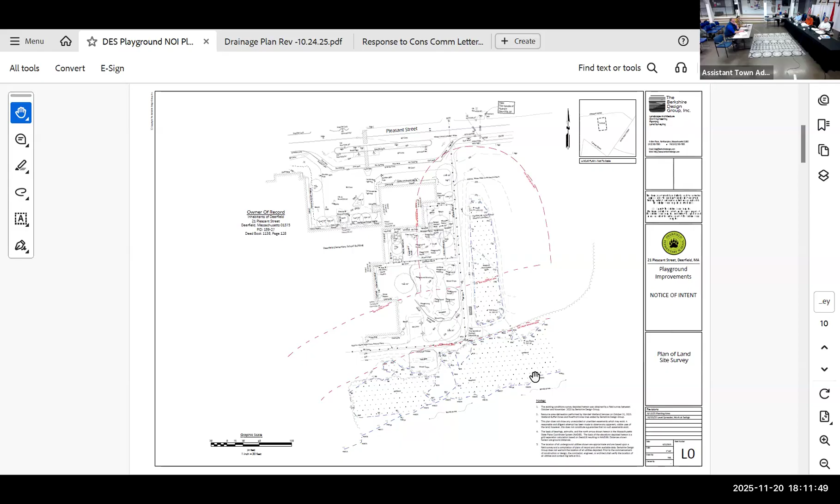On the slope? Higher, yep. And that would be a new pipe that goes out to a spreader? Yes, this is a new pipe that goes out to a spreader. This is the existing conditions plan. I can zoom in a little bit. Okay, no, I was just trying to get the horizontal picture coming across.

The second one, you mentioned the request for a 2-to-1 on the reclamation area. I think it was not a request per se. Initially you had a 1-to-1, but within the riverfront area, redevelopment within the stipulation called for a 2-to-1. So it wasn't a request, it was part of the regulation that we pointed out to you. I just want that clarification.

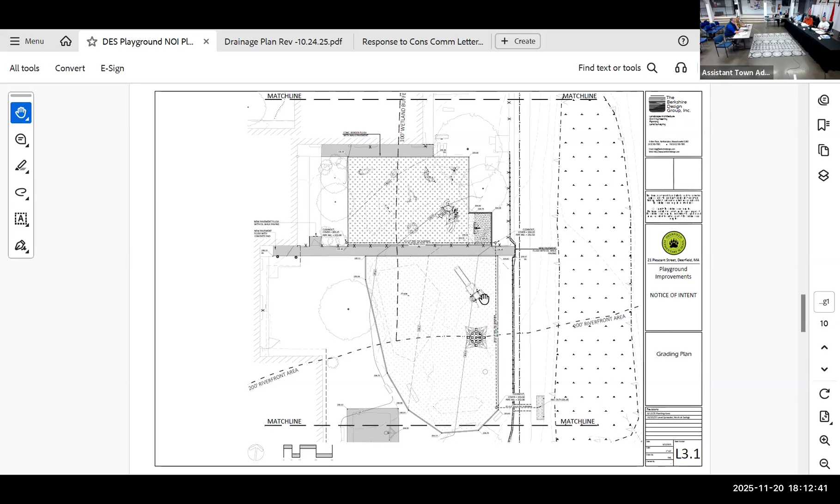And so that is the extent of the project. What we were proposing originally was, again, the recycled rubber. That recycled rubber would have had a profile with the under drain right at the bottom, which is what you're seeing here. So the surface is the rubber, then we have a leveling course of gravel, then we have gravel, and then we would have had this pipe pretty much right at the bottom here.

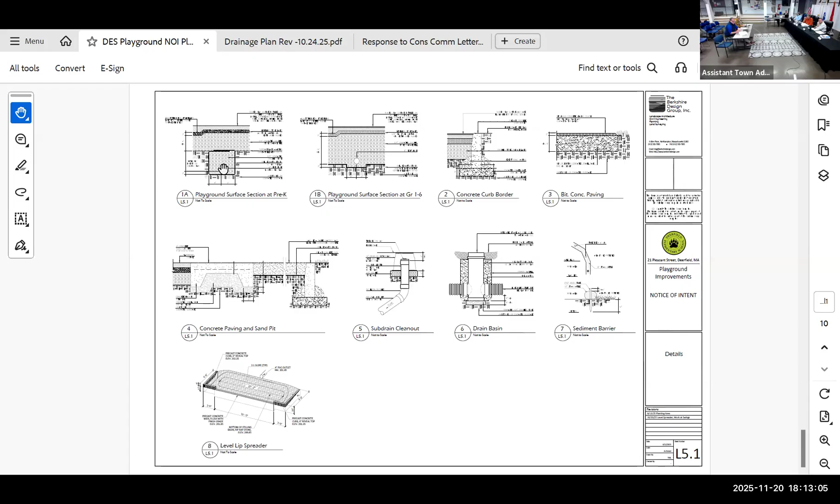What we are proposing now, in conjunction with doing the full EPDM non-recycled rubber, would be to elevate that pipe. And I'm going to show you right here.

So what we are proposing is to elevate that pipe, not being at the bottom of the actual gravel, but be elevated by around 3 inches, or exactly 3 inches, above the gravel. And what that would do would be allow for some infiltration.

The board had requested or had asked if we had done some test pits. We had said that we didn't do our normal test pits we would do for a parking lot, because those normally take a larger machine to do, and we didn't want to disrupt the playground. But as the board asked, then we went out.

Actually, that was on the Sunday after the meeting, so that was the 30th of October, which we had a big storm that night. I went out on Sunday with a post digger, which is not an official test pit. We normally want to go 7 feet deep, and we want to make it a certain size, but trying to prevent disturbing the playground so that it keeps working for now, I went out and did a test pit about 4 feet deep, which we included in the package.

And we took some samples, took pictures of the whole process. We brought that back to our office. Our engineer looked at it, and he did a certification of the test pit, saying what type of material it was, which is a loamy sand. So being a loamy sand, that's a material that actually is good for infiltration.

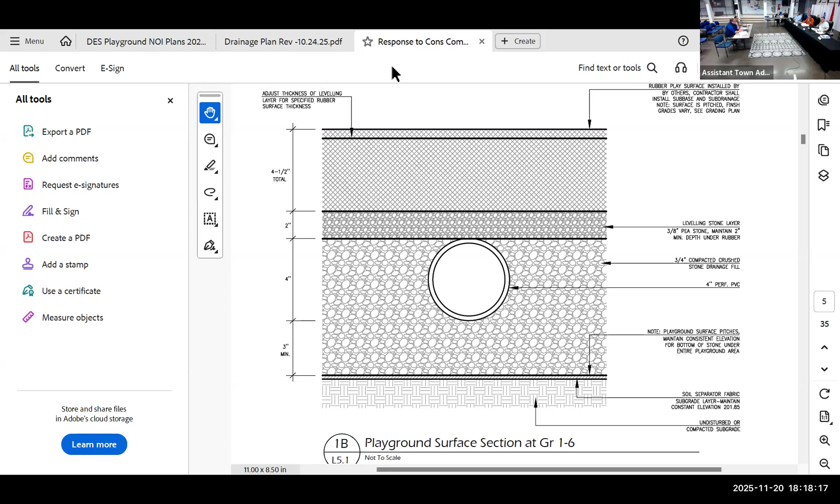But that's what we are, in addition to handling the storm, which I think is going to be a great thing, because then we prevent as much water coming out of our surface into the resource. In addition to that, having that amount of capacity for infiltration also shows that there is an uptake of some of the contaminants or the heavy metals, and zinc in particular, which I know was a concern after the several documents you guys sent us and the conversation we had last time when we were here.

I just had to interrupt quickly. It came in really late this afternoon. Did the commissioners have any chance to look at that? I thought I printed it out for everybody, but I don't seem to have it here. I have a copy if you need it. Up until now. Yeah. So I'm not sure we have the ability to apply it, but okay. So Sean, I'm not sure if you were able to see it. I can, and I have a paper copy if you want it. I can definitely share with you, or I can share it on the screen.

And basically what we did, I wanted to make sure that what I had said in the letter had some background, because we had done the numbers, but we didn't have those numbers. Was this based on the latest edition? I think it's revision 2 or volume 2 of the stormwater handbook from the state. Yes. So the BMPs, you did a search on that? Yeah. All by the book, as they would say. Okay. So various BMPs would be applicable to metals uptake.

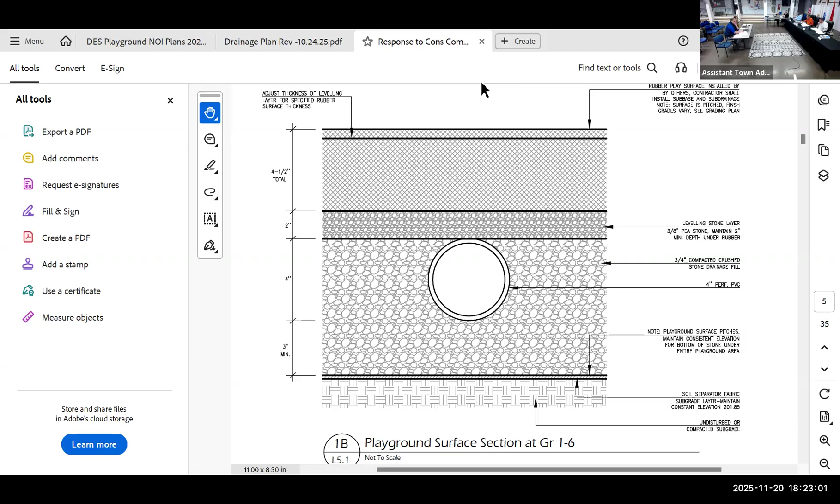They do show removals of some metals, and I don't see the exact percentage here, but the design would have to be as such. Okay, I just wanted to make sure you looked at all the BMPs, and I think you answered that. Yep. Okay. So that would be the first option. We put 2 options into that last document that we sent.

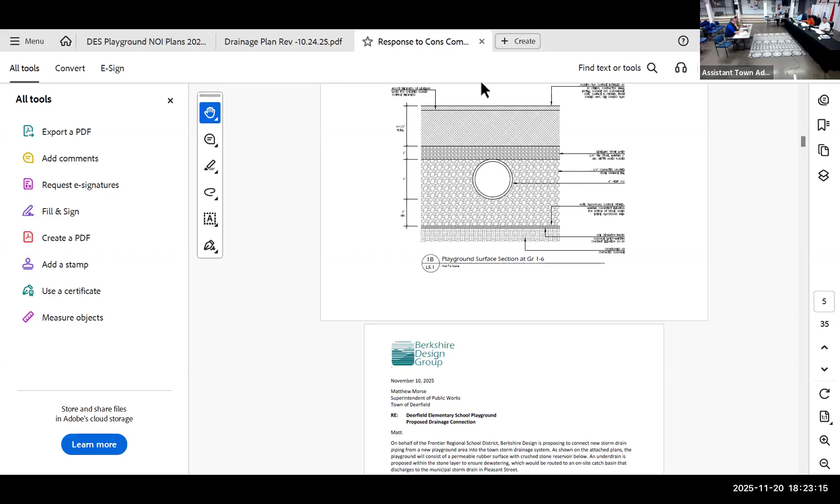The second option would be to try to get basically any of the storms that would hit this site, all the way to the 100-year storm, and capture it completely by the gravel layer underneath the safety surface. In addition to that, we'd add a larger pipe to collect all that water within the 10 all the way to the 100-year storm, get it out of the riparian zone or any of the buffer zone of the wetlands, and direct it to a catch basin at the street.

Again, I think the first option is the ideal one. This is basically an option just to take the drainage that's coming out of here and take it out of the riparian zone, but it's more of a technicality. We're taking it away from the regulatory areas and putting it in a catch basin. We talked to DPW, as you had asked us, and we gave him as much information as he requested. Last Monday he answered that there didn't seem to be an issue doing that in regards to the system.

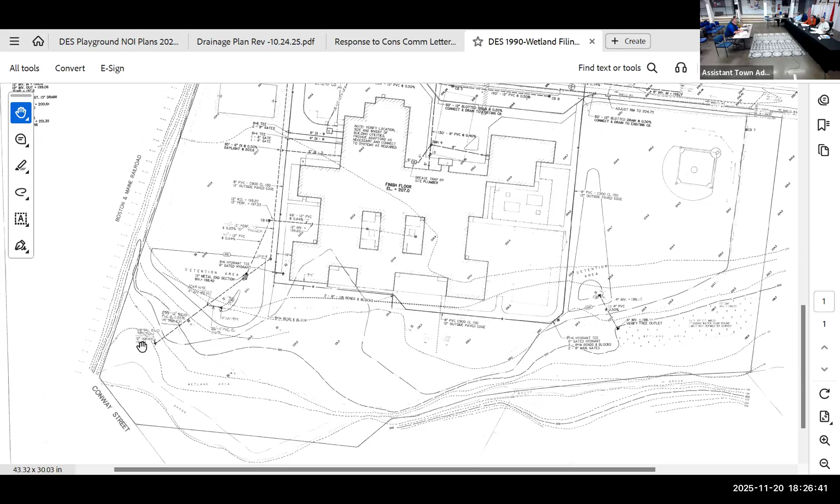But it seems like everything eventually makes it to this control structure, which normally has baffles inside, and if it gets to a certain level, it directs the water in a certain direction. Then there's an overflow pipe that goes along the west side of the school, eventually goes under another retention pond, and outlets straight out to the Bloody Brook on the opposite side. I know there were questions last time as to where the water goes. I just want everybody to be clear that it basically goes all the way around and eventually makes it back to the Bloody Brook.

That's very helpful, thank you, because I talked to Matt Morse at DPW today to see where he's at, and he's comfortable with the amount of material, but he had a question of where it goes. He didn't know if it was the detention basin on the railroad side, this one, or if it was coming back, so that answered that question. He had another question on the 17th: would you have any updated plans for a deeper drainage system? He wrote back he'd try to get that before the 20th. Were you able to?

It's basically the package we've shared with you that shows the pipe elevated 3 inches, so now we have the 3 inches for infiltration. Okay, when I talked to Matthew earlier today he wasn't sure, so just clarifying that so other members of the commission know.

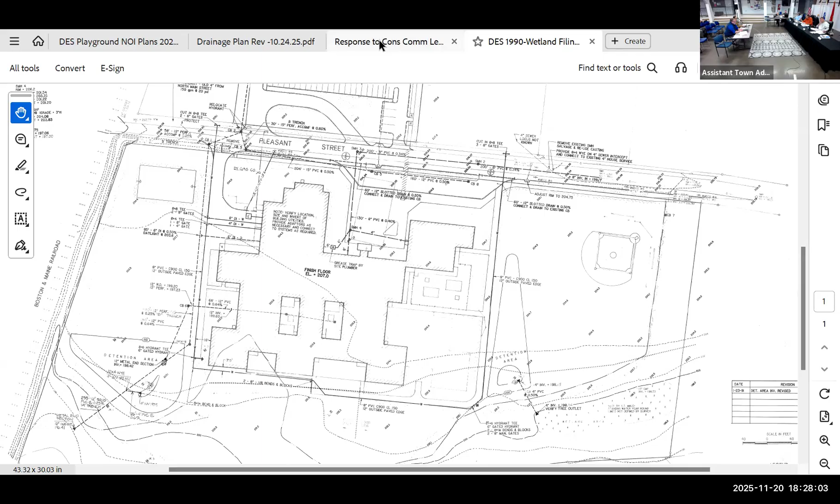So did you look at, if we're taking the water out of the playground underneath the structure, which is in the resource area, pumping it back out to Pleasant Street, turning it back around, taking it down to the detention pond on the west-hand side, and then into the Bloody Brook discharge, is that a continuous hydrologic connection? It actually goes first, more than likely on the first events, back to the parking lot because there's a retention pond there.

When a larger storm comes in, then that overflows and then goes back. But yes, it's connected to the same system. So it's not a separation of the resource area. It's just a kind of extension in a roundabout way of what you're taking from the resource area, moving up outside of the resource area and bringing back to the same spot.

Yeah, so that's the logic of the connections there, because all the water basically on Pleasant Street leads to all the other catch basins, goes all the east side, and eventually makes it to the overpass or a little bridge that's there and outlets there. So there's no other place where this water would go.

So it's important, I think, when you look at that option, it sounds like we're pumping it away. It's a gravity feed system, not a pump, sorry. But it's going to come back around to the starting area, which is going to be the same as option one; it's going to go to the Bloody Brook as well. Just clarification. Yep, that's why I wanted to be completely transparent on that.

The only thing we're doing here is taking it out of the point discharge itself. It's taken completely out of the riparian zone or the buffer zone, so it's outside of jurisdiction, but it does go into the same system. But it may be within jurisdiction if it's a continuous hydrologic connection, because you're working within the resource area, moving some of that resource out and bringing it back to it. Completely understand. But we're putting the actual outlet outside of the resource. That's what we tried. A little nuance to this one, but just want everybody to understand, it's coming back to the same place.

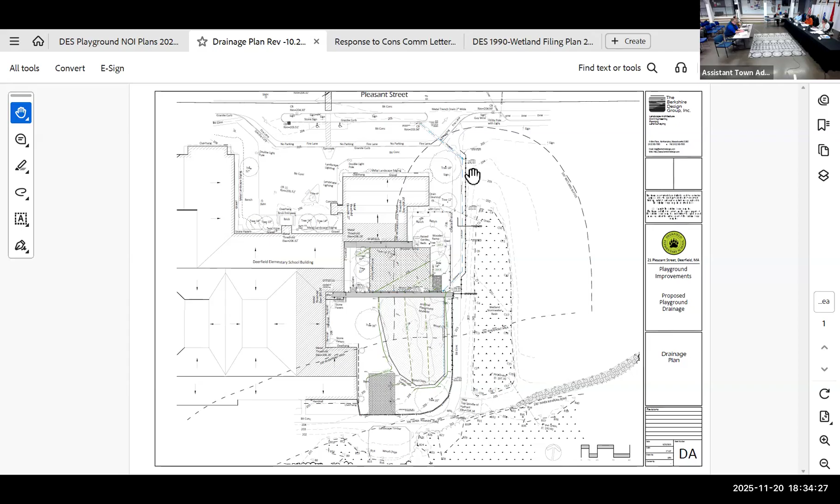I know it's really hard for us as volunteers to work through some of this stuff. I would love it if we would have found somebody who took a playground and did a long-term study, take the under drain and start taking samples of the under drain of an actual playground with the surface and just do a long-term study. That, to me, seemed the most logical way, but everybody's doing these studies where they take a little piece of something

and they dissolve it. We need to find a grad student, a PhD student, to get a research project. I would love it, I would put a paper. I would love to be that grad student right now, but unfortunately I'm not anymore.

But it does leave us trying to decide on the material in the ground. We don't have leachable studies, we have some indication, we asked for some type of encapsulation, there's no enhancements to the detention areas. We did ask for the groundwater and soil studies, which is basically a fundamental request for any work like this. That was declined, because they didn't want to bring the heavy equipment out there. So we didn't do a full study. Thank you for doing the one soil boring test pit to 4 feet. I'm amazed there was no groundwater at 4 feet.

Interestingly enough, when you look at the retention pond, the outlet is at 197, I believe, and this is like a 204 or something like that. Even after that storm, there was a little bit of standing water right at the bottom of the corner here. But that is still lower than the 4 feet under the playground, because it drops. 207. When I was out there, it made sense.

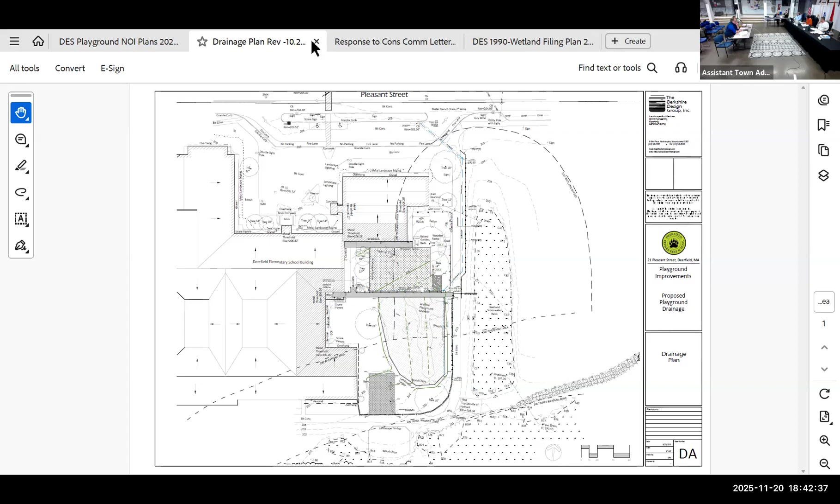I ask the commission, do you think you've got enough information to close out the hearing? Because when we close out the hearing, there'll be no additional materials taken in that could be presented. So do you think you're in a place where you have information that you can make decisions on? And it's really hard to explain the decision because the NOI that was submitted, there's so many potential alterations to it and options. There's 2 new options tonight, and they're not articulated in a revised NOI.

We could ask that the consultant provide an NOI with something that we'd agree to, but otherwise we're going to have to write it up pretty much ourselves. But those are the decisions. The NOI that's been brought in front of us, taking into effect the comments and discussions over the last 4 or 5 months, and emails and so forth that we would have to try to put together. If I may, I don't know if I can. Yeah, I haven't closed it yet, so go ahead.

I think it's spelled out in the last letter that we sent you, the option. It's basically the same on the horizontal, it's the same design. We just have changed what type of surface it is instead of the recycled rubber. So on the last letter that we sent you, which was Monday, there are 2 options. The first option would be the one that I think is ideal, which is using fully non-recycled rubber all the way through, even though it's more expensive than if we use the recycled rubber. And then elevating that pipe, the drainage pipe, so that we can have an area underneath that would help for infiltration.

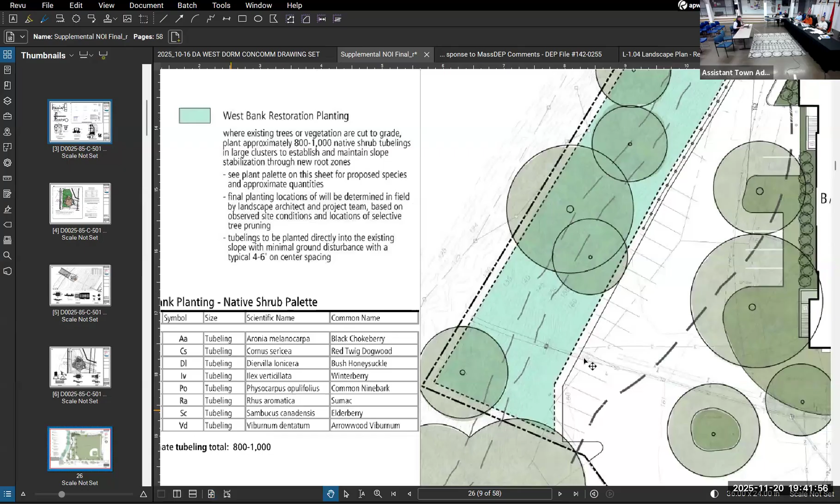So I was going to ask you about that. So it's just a variety of tubelings to see which works? Yep. Yeah. So we have, as I mentioned verbally last time, and I'll have to send you a new sheet. This table was on a no plot layer on the landscape architect's drawings. But it was verbally mentioned at the last meeting: the black chokeberry, the red twig dogwood, bush honeysuckle, winterberry, common ninebark, sumac, elderberry, and arrowwood viburnum.

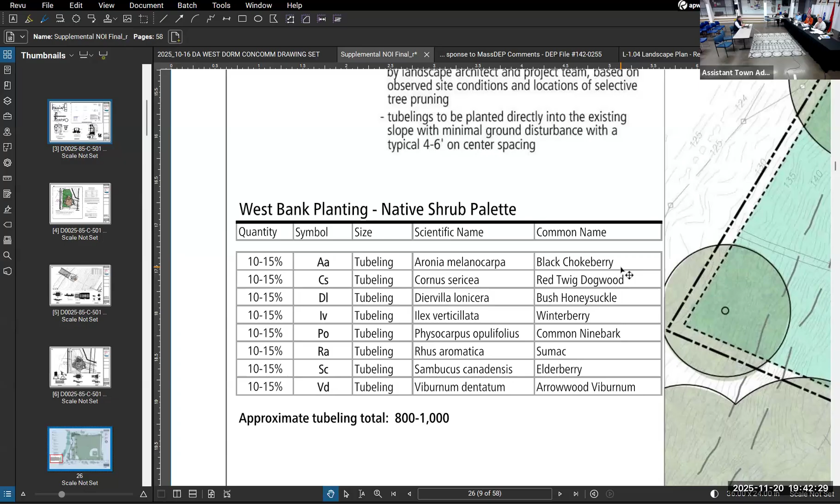We're proposing to put these in about 10 to 15%. So yes, the idea is to have these and see what's thriving and what's surviving, and have these be in a mixed array under the guidance of the landscape architect, as noted on the plan. That's the West Bank restoration plan that was on the back here? That would be correct. Yeah. Okay. So it's going to go on that bank. Yes, this entire light green shaded area here. 4 to 6 feet on center across that entire bank area. Okay. Thank you.

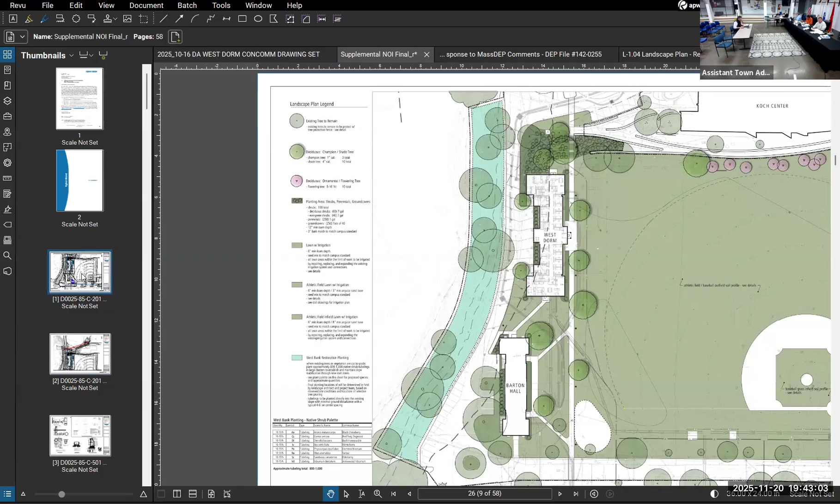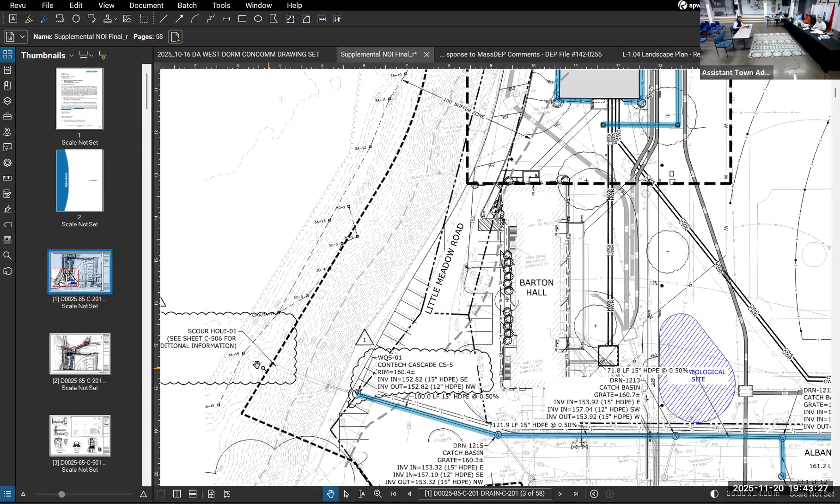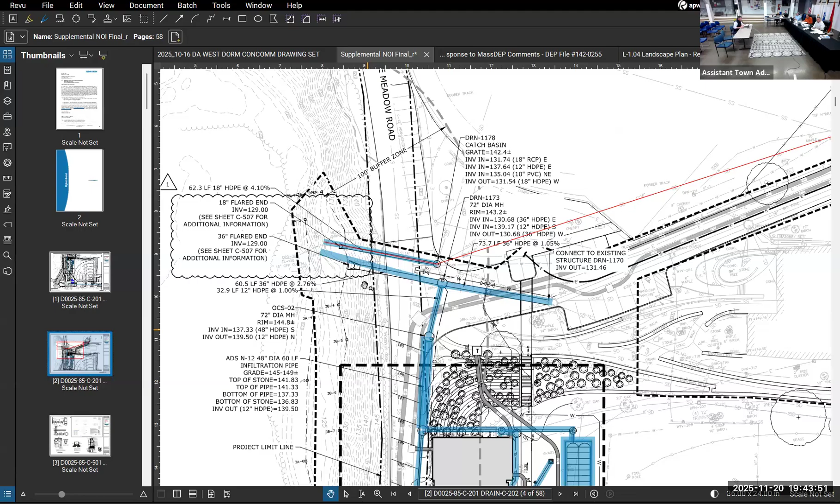Going back up to the plans that were resubmitted, we had the stormwater basins, and here we had the updated hydrodynamic separator off of Albany Road. Again, the storm lines are highlighted in blue. So this one to the south is the hydrodynamic separator that's being proposed right in the parking areas, before then continuing down to the chute, which is detailed on a separate page. Up to the north as well, we had the new 36-inch culvert that was being installed. And again, we are pulling back those outfalls further to Little Meadow Road. And then I'll show you on a separate page where we have details of those outfalls.

So this is the outfall for the wetland restoration at the Little Meadow Road outfall. This is the northern one. What we're proposing for mitigation of wetland disturbance is not only are we pulling these outfalls back to the east, we're going to go in and remove all of the riprap that's there. If you've been out to the site, the existing pipe is cascading out into the wetland itself, and there is a large amount of riprap that is encircling that whole area. So we'd be removing that, restoring it with wetland plants, and pulling back the outfalls, putting in the scour hole for the 36 and a riprap apron for the 18-inch pipe.

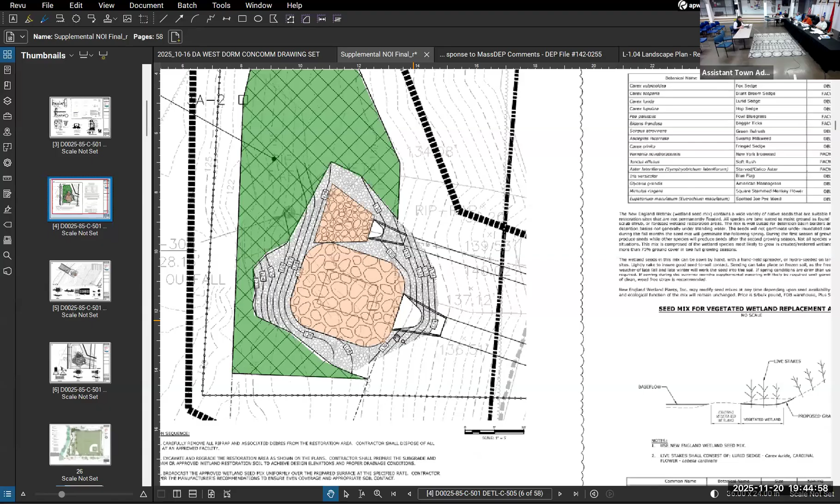And both those outlets would be at surface level, or buried a little bit, tucked into the hillside. Good. So they would not be, and get rid of that waterfall. Get rid of the waterfall feature. Yep. And then for the southern outfall, that's down the corrugated metal half pipe that comes down the hill. This is installing the scour hole at the bottom of that half pipe, so that there's a plunge pool for water to gather, and then an apron to disperse down to the wetland itself.

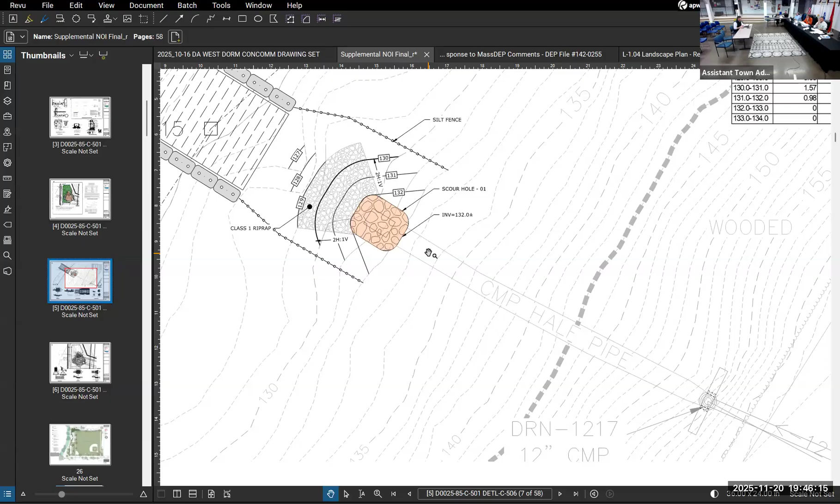I had just a question on that one. It's amazing seeing that coming down the hill, that little half tube. Is that enough sizing, you think, for the riprap to maintain the water flow that comes down? I don't know what the water flow is at its peak and volume, but it just seemed like kind of a small area there at the bottom. It comes down at a pretty good velocity, I would assume. It does. We did size this. It's 8 feet per second in the 10-year storm. The existing is around 7 feet per second. So while it's a larger amount of structures tying to it, it's not dramatically increasing the velocity.

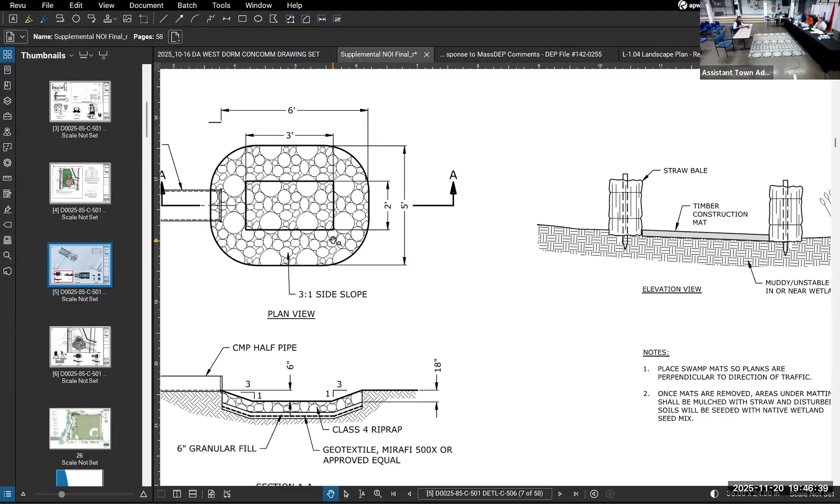And we did size that accordingly. The riprap is larger riprap, around that 12 to 18-inch stone. It's embedded 18 inches deep. So even though footprint-wise it's 5 foot by 6 foot, the stone size itself is larger for that. Yeah, okay. The whole area looks like an 18 by 15. Is that the right one? Or no, that's it. It's a 6 by 5. Yeah. With a 2 by 3.

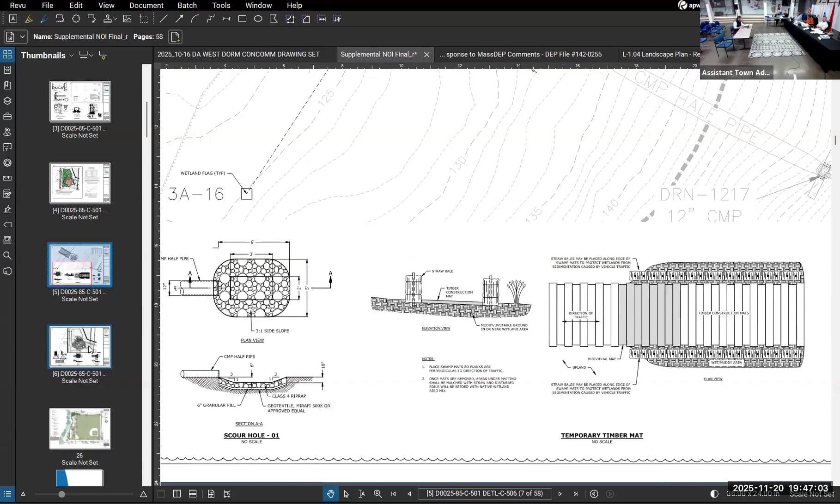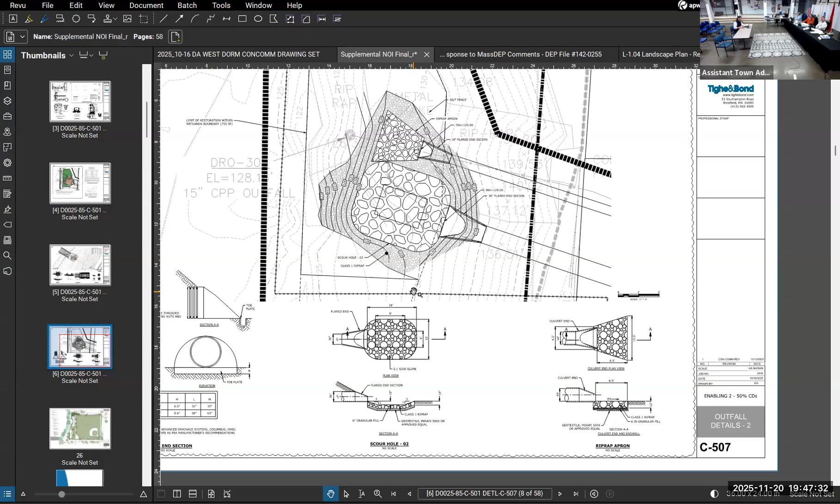Yeah, this is the northern one. That is a larger 15x18. The flow coming out of that 36-inch pipe is much larger. So while the corrugated metal half pipe from the previous one certainly looks much larger, and certainly has the steepness of the hillside, the contributing watershed to that outfall is not nearly as large as what's coming through the 36-inch culvert. So those sizings do reflect those hydraulic calculations.

So that is the update to the plans that are in the NOI. The entire NOI text was revised and sent in as well. Would you like to discuss the?

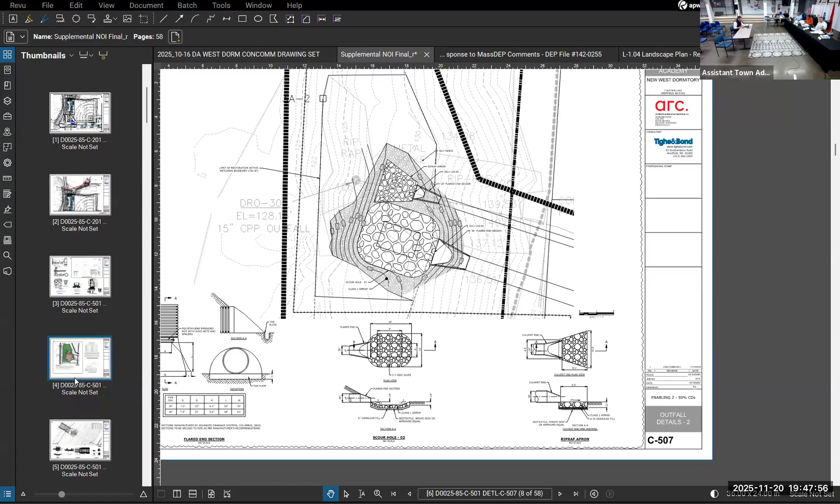Correct. We had talked about potential erosion controls at the bottom of the hill as well. A good point. We were looking at that. So during that work where you're taking down the trees and such, there's going to be some interruption of banking and soils and so forth. So we're considering a condition of running a line of erosion control at the base of the hill before it hits the swale. Yeah, we would be agreeable to that. Okay, thanks for reminding me on that. Erosion control at base.

During the tree removal section, and just leave it there for base of slope, and also stumps. Okay.

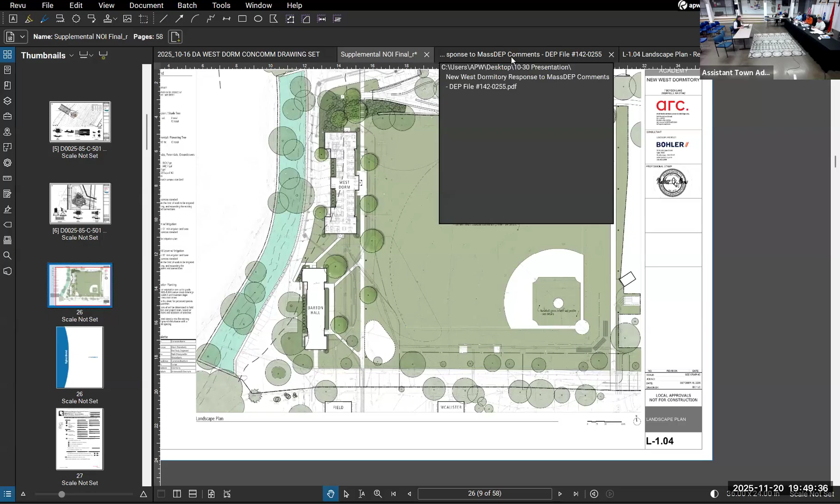You had the letter back. DEP had 7 or 8 comments, I think. If everybody has read that, I don't see anything jump out at me. I think a lot of those questions were answered in this. On the first one, the impact, the proposed alterations. Was that an increase or decrease? So it wound up being an increase when we went to do the new culvert headwalls and the scour pads. So we had to increase our disturbance to better the situation. Agreed.

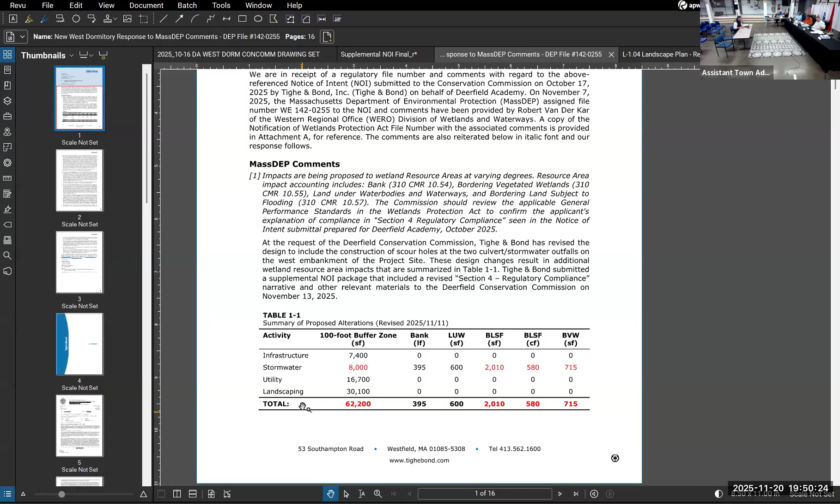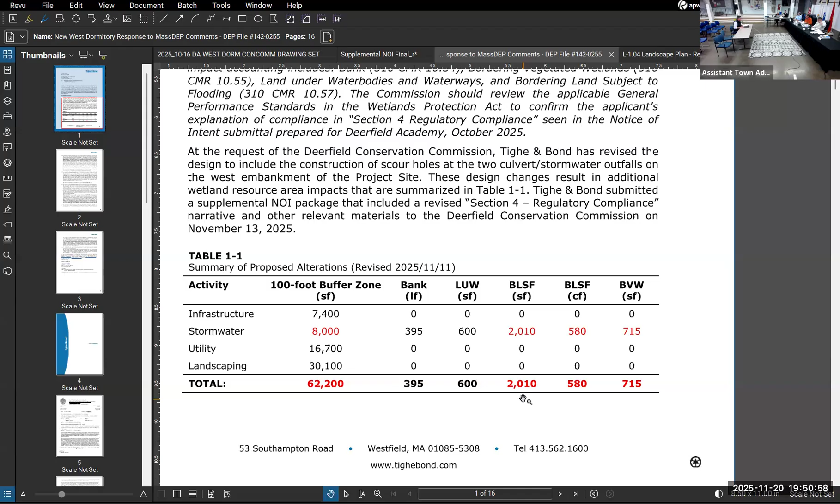And which one of these is an increase? That's the stormwater one in red. Question 1, there's a table on the bottom. Which one was it, stormwater, the second line? Yes, second line stormwater. So it's 4,200 square feet or so. Okay. So some increase of work in the area. But I would suggest that's an improvement from what the scour zones are now, getting those scour pads in place.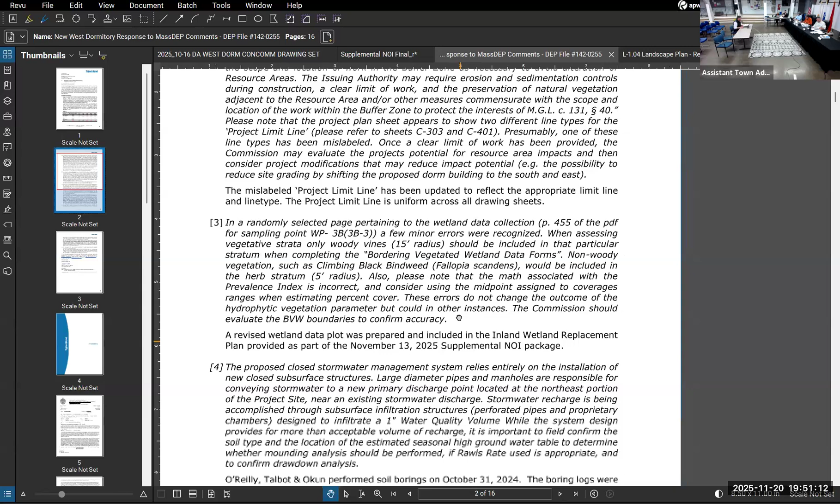Number 2, I had the question of the erosion controls at the bottom of the bank. We just talked about that. You fixed the project limit lines on your sheets. Yes. I can only find one on the new sheets.

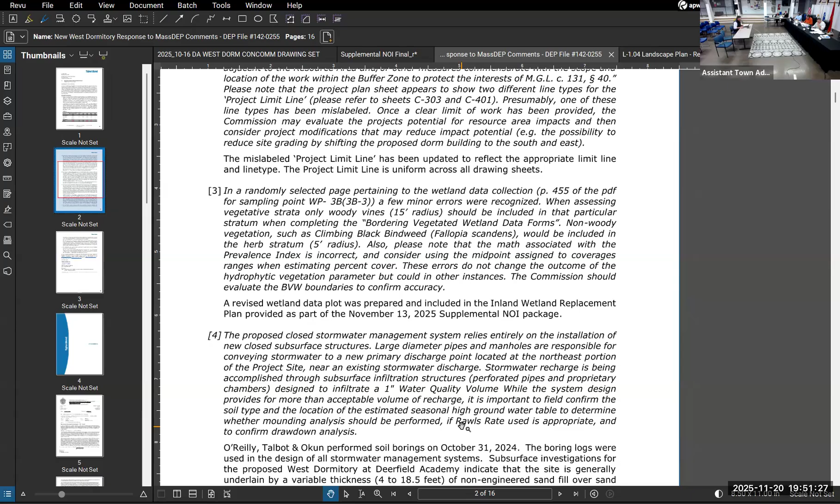Revised wetland data plot, this is question 3. I included the inland wetland replacement plan. And what was specifically on that? You said that was part of the November 13th submittal. Yes, we had updated that in there, but I believe when assessing the vegetated strata the numbers weren't quite right, so we revised those tables.

Chad, if you have any? Yeah, hi guys. Chad Raymer, wetland scientist. When we went out and delineated, a couple of those herbaceous viney species were included in the vine section, whereas they were supposed to be included in the herbaceous section. So we just flipped those species into the herbaceous section, and it changed a couple of the dominant plant species around. It's still hydrophytic vegetation within that wetland, so there's no real change there. We just moved some things around inside that plot.

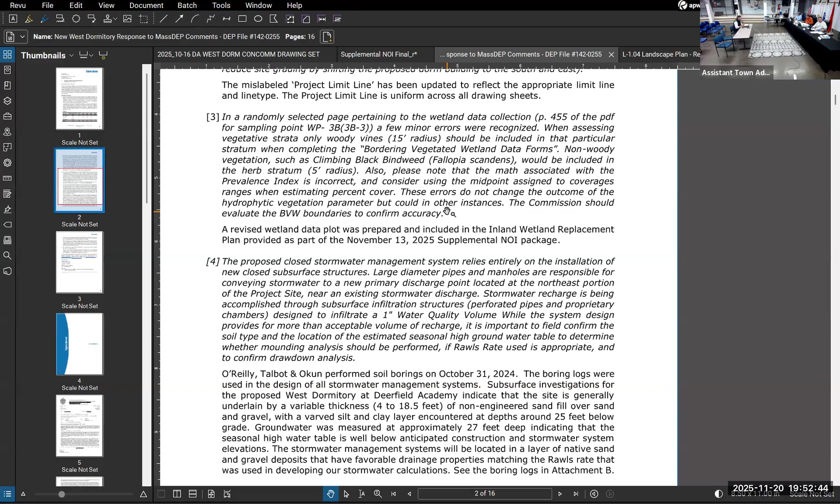Okay. All right, so I saw that, okay. Number 4, the stormwater management system and installation of subsurface structures, that seemed to be pretty straightforward. You did the soil studies. I looked at the soil and you got a lot of fill and then a lot of sand and gravel. Yep. And those are typical readings that we have all over campus. Yeah, I bet. It's just built up on, okay.

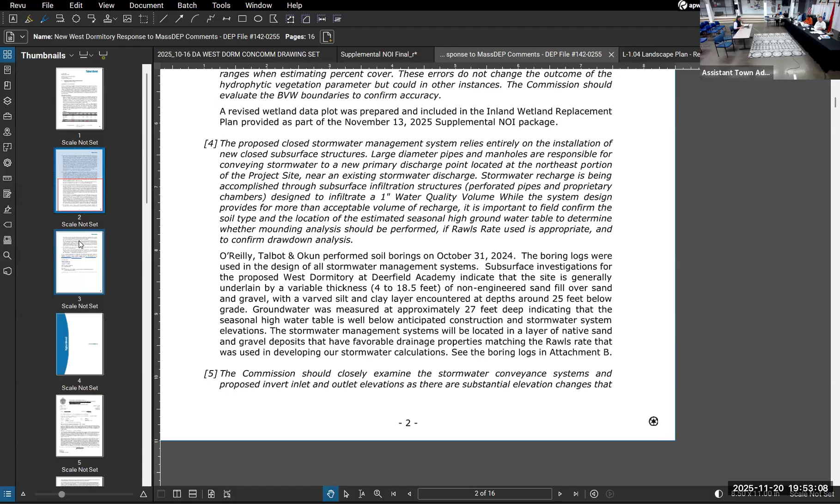Yeah, I don't see any other questions myself. They were answered. There were 6 questions from DEP. I just had a couple of questions I already asked, but did anything else jump out to anybody on the responses? No. Anything that you want to point out, Andrew, at all on this? No, I think this was just a continuation of the conversation we had last month. More than happy to throw in the extra erosion controls at the toe of the slope. And any other questions you have, I'd be happy to answer.

Yeah. Appreciate you getting that done by the time we had this following the last meeting, and having the revised NOI is helpful. Okay. Anything for you, Sean? Did you shake your head because we couldn't see you? Yeah, no, nothing to add. All right. So then I don't think we need any further information. Any other discussions from the commissioners?

I'll go ahead and close this hearing and take a motion to close the hearing. I'll make a motion to close the hearing. I have a second? I'll second. Okay, motion on the table to close out the hearing for the NOI for 0 Little Meadow Road. Take a quick roll call vote to close the hearing. John Libby, aye. Darren Damaris, aye.

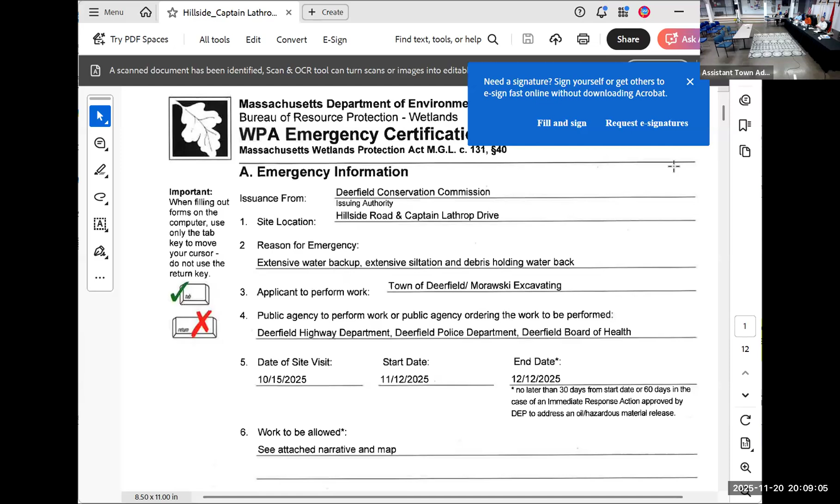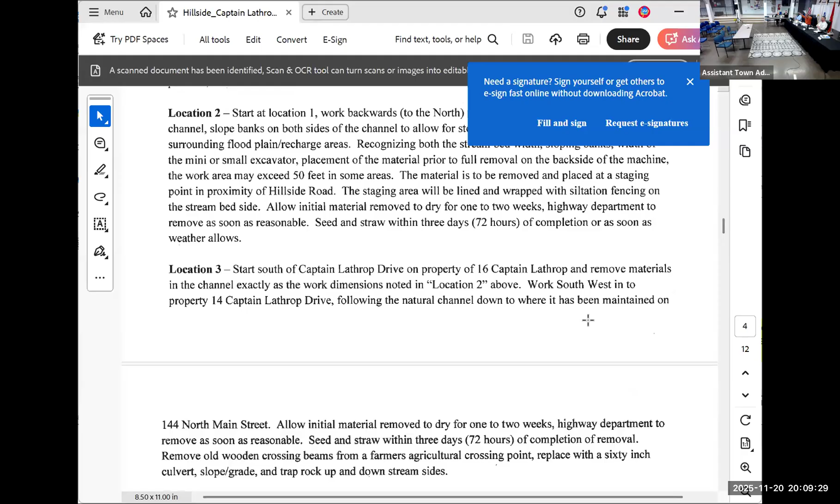Very, very minimal in depth what we're allowing them to do. But it did open it up quite a bit. There was actually some really good flow going in there. And by the time I left at 12:30, everybody was working to help the contractor get his excavator unstuck from the wetlands. It just sunk right in, right up to the top of the cabin. We got him out of there without a whole lot of fuss, but it's quite a quagmire back in there.

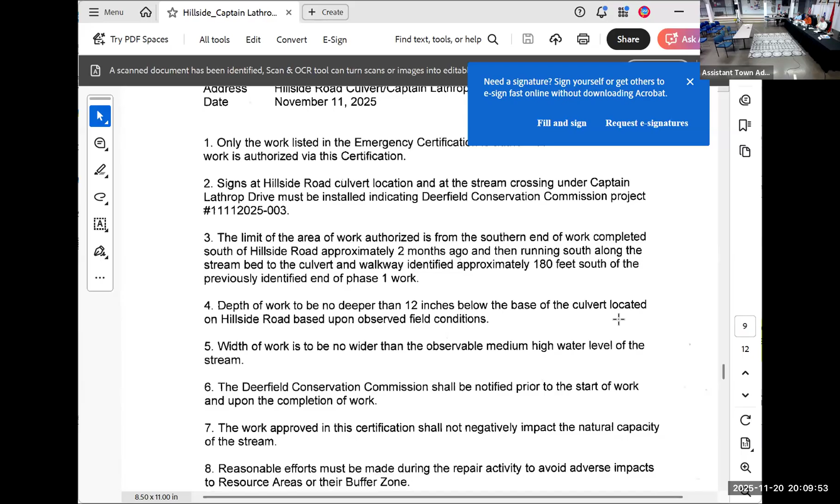So that part of it was done. Tomorrow we're meeting at 8 o'clock. If anybody else wants to join us, Tim and I with DPW, the contractor and chief, to look at that stretch between the middle of down below Hillside over to Captain Lathrop for what we need to do next.

And then early next week, we'll bring in a little small mini excavator, small guy, to do one or two more locations just south of Captain Lathrop, where we can reach down into the stream from certain residences right there off their lawns. And it's like minimum. I mean, we're maybe taking a couple of yards of material out in each place.

And now that material is getting taken to the transfer station. When it gets a little drier, we're trying to get it out of there within 2 weeks. That's part of the conditions. But Amy pulled that up. You can see all the conditions in there if you want to read through them.

Yeah, I was going to read. I think this is pretty much the same because we did vote on this, and then now this is a revised version of what you voted on. And I think the difference starts at condition 5, or even that. At condition 7 is what we've added since the last time.

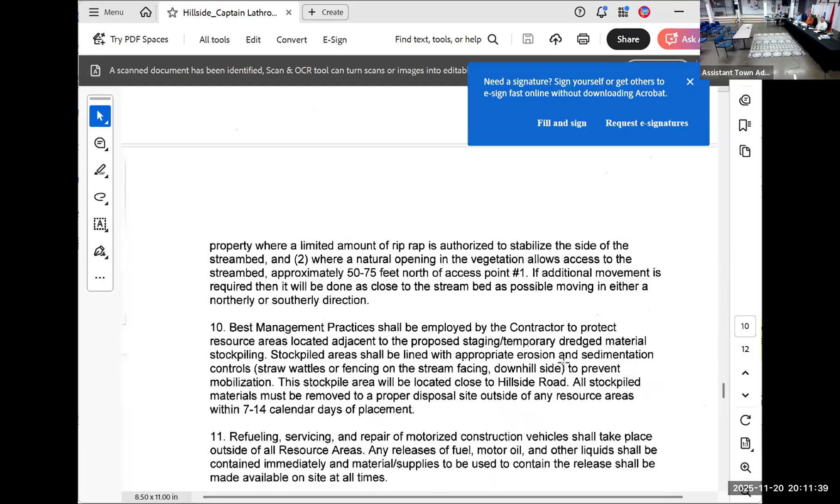The work approved in this certification shall not negatively impact the natural capacity of the stream. Reasonable efforts must be made during the repair activity to avoid adverse impacts to resource areas or their buffer zone. All staging areas and access points shall be minimized and limited to that necessary to allow the work with access to the site. Only 2 lateral access points will be allowed, one at the lower culvert, slightly southeast of the existing barn and the neighboring property where a limited amount of riprap is authorized to stabilize the side.

You guys can maybe read this. I didn't realize there were so many. Are you guys comfortable reading for yourselves? Or shall I read it into the record? I can't see it. Okay. So, I can keep reading.

Property where a limited amount of riprap is authorized to stabilize the side of the stream bed, and 2, where a natural opening in the vegetation allows access to the stream bed approximately 50 to 75 feet north of access point 1. If additional movement is required, then it will be done as close to the stream bed as possible, moving in either a northerly or southerly direction.

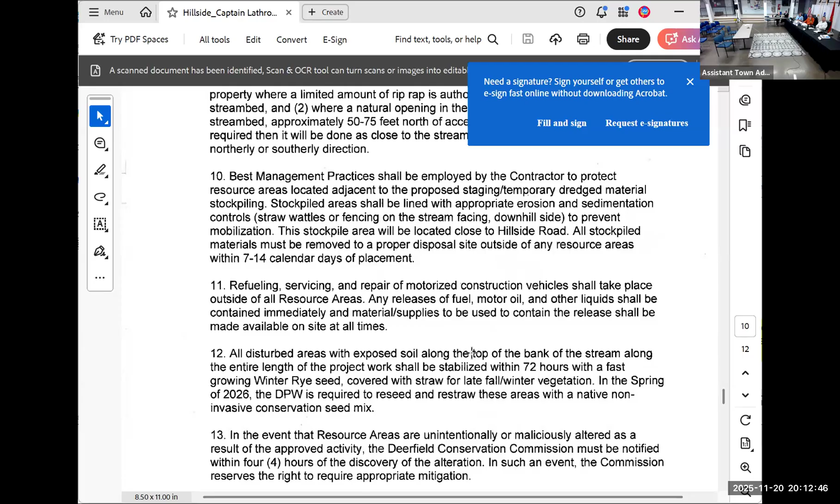Best management practices shall be employed by the contractor to protect resource areas located adjacent to the proposed staging temporary dredge material stockpiling. Stockpiled areas shall be lined with appropriate erosion and sedimentation controls. Straw wattles or fencing on the stream facing downhill side. To prevent mobilization, this stockpile area will be located close to Hillside Road. All stockpiled materials must be removed to a proper disposal site outside of any resource areas within 7 to 14 calendar days of placement.

11, refueling, servicing, and repair of motorized construction vehicles shall take place outside of all resource areas. Any release of fuel, motor oil, and other liquids shall be contained immediately, and materials and supplies to be used to contain the release shall be made available on site at all times.

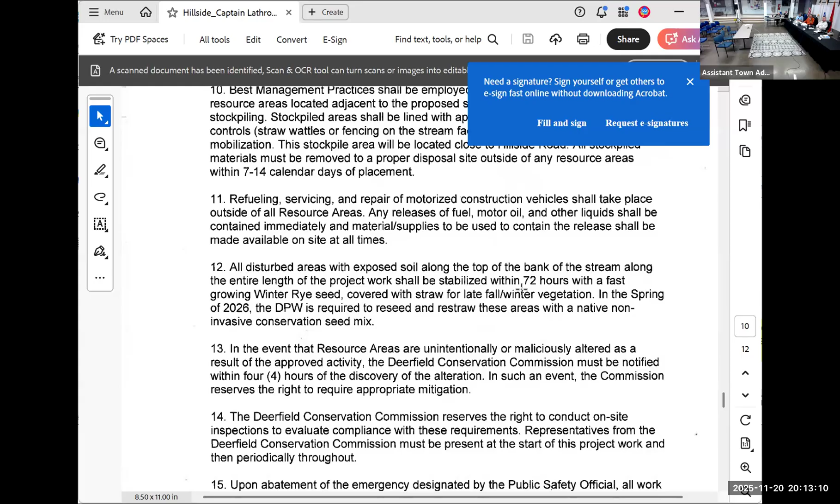12, all disturbed areas with exposed soil along the top of the bank of the stream along the entire length of the project work shall be stabilized within 72 hours with a fast-growing winter rye seed covered with straw for late fall winter vegetation. In the spring of 2026, the DPW is required to reseed and restraw these areas with a native, non-invasive conservation seed mix.

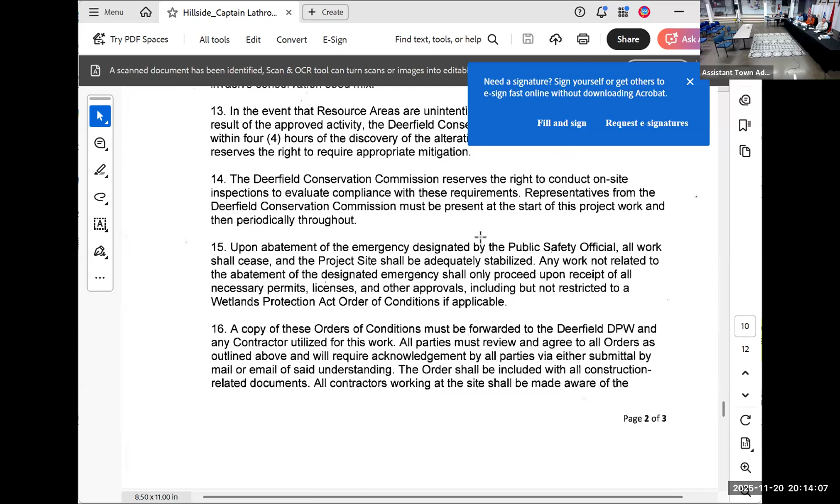13, in the event that the resource areas are unintentionally or maliciously altered as a result of the approved activity, the Deerfield Conservation Commission must be notified within 4 hours of the discovery of the alteration. In such an event, the Commission reserves the right to require appropriate mitigation. 14, the Conservation Commission reserves the right to conduct on-site inspections to evaluate compliance with these requirements. Representatives from the Conservation Commission must be present at the start of this project work and then periodically throughout.

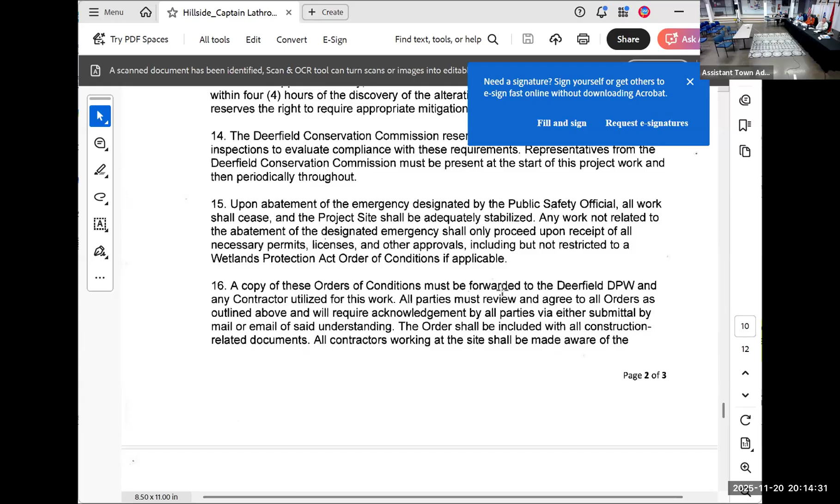15, upon abatement of the emergency designated by the public safety official, all work shall cease and the project site shall be adequately stabilized. Any work not related to the abatement of the designated emergency shall only proceed upon receipt of all necessary permits, licenses, and other approvals, including but not restricted to a Wetlands Protection Act order of conditions if applicable. 16, a copy of these orders of conditions must be forwarded to the Deerfield DPW and any contractor utilized for this work.

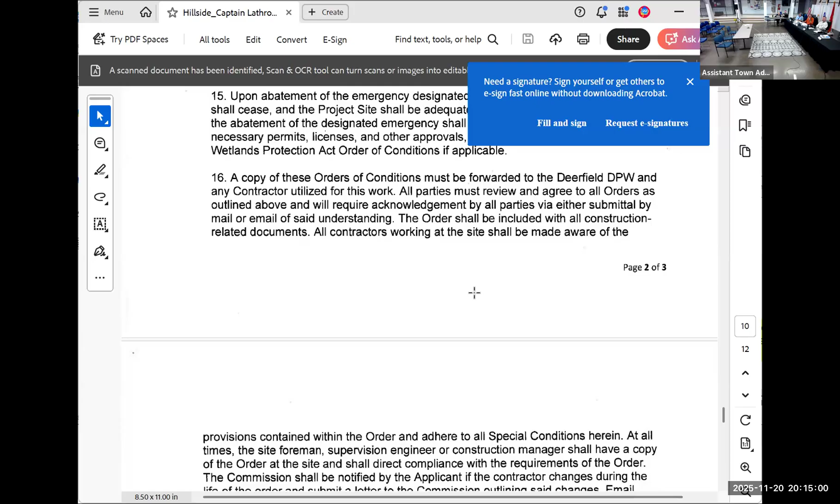All parties must review and agree to all orders as outlined above and will require acknowledgement by all parties via either submittal by mail or email of said understanding. The order shall be included with all construction-related documents. All contractors working at the site shall be made aware of the provisions contained within the order and adhere to all special conditions herein. At all times, the site foreman, supervisor, supervision engineer, or construction manager shall have a copy of the order at the site and shall direct compliance with the requirements of the order.

The commission shall be notified by the applicant if the contractor changes during the life of the order and submit a letter to the commission outlining said changes. Email submission is acceptable. Thank you, Amy. Can you repeat that?

Aren't you all impressed with how I write conditions like that, you know? Should have been a lawyer. No, most of them came from Deja at DEP, so I give her all the credit. I just cut and pasted.

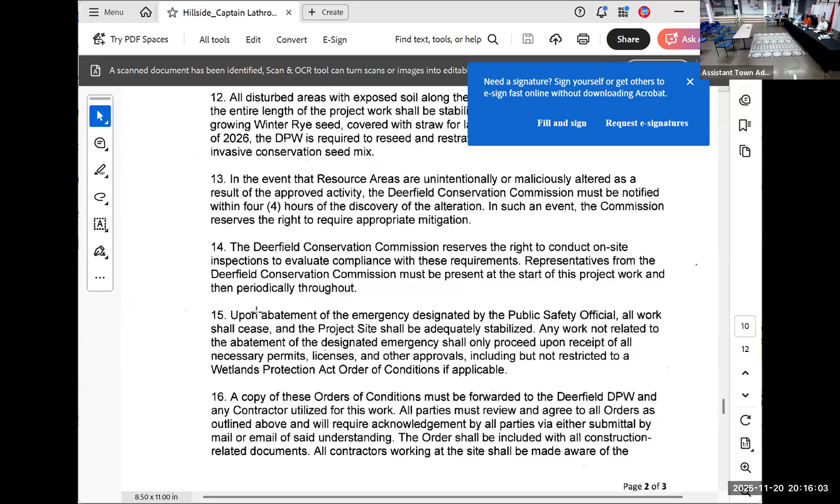All right, so if you think you want to ratify it tonight, we do need a motion to that before we vote? Yeah, motion to ratify. Okay, let's take a motion to ratify if everybody's okay with it. Kate Devlin, I'll make a motion to ratify the emergency certification for Hillside. Do I need a- Second? Do I need an address? There isn't really. We know what we're, Hillside culvert, yeah. Hillside culvert. All right.

I don't see any other comments. Hear any comments? Take a roll call vote to accept the motion. John Libby, aye. Darren Damaris, aye. Kate Devlin, aye. Pete Law, aye. All right, good. So we got that one ratified. We can put that one.

Hopefully the work will be done next week, and many thanks to Tim. He's been out 7:30 this morning and throughout the morning, and then be back out there first thing tomorrow morning at 8 o'clock, and probably again next week. So having a conservation agent here in town is a really helpful thing.

Site visits completed in November. Town of Deerfield on 11/3, and that was with the Franklin County Conservation District, discussing some potential pilot work here. 11/10, Town of Deerfield, was the superintendent at DPW regarding the elementary school project. On the 19th was at 89 Whately Road with Tim on the enforcement order that we discussed.